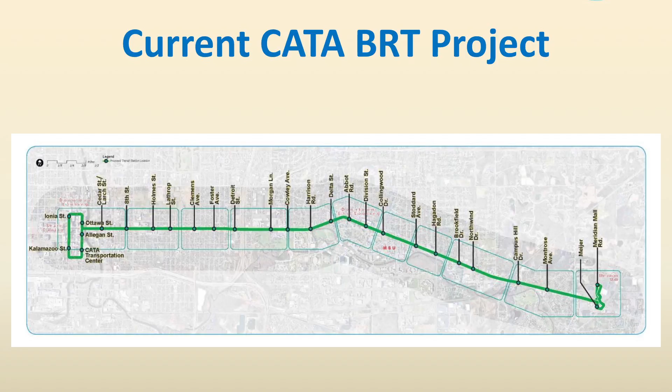One thing to note about the Capitol Loop is the buses will actually go contraflow on Grand and on Capitol. So one of the lanes used for autos today will be used for a dedicated bus lane in the opposite direction of the vehicles on Grand and Capitol.

From that point on, as we head east on Michigan Avenue, we will continue through Lansing and head easterly. So we're on Michigan Avenue heading east, and as we head east we will approach East Lansing. There are stations along the way, of course, spaced at about a quarter mile, roughly.

As we head east on Michigan towards East Lansing and MSU campus, we will hit Grand River. At Grand River, we will turn right and continue to head easterly on Grand River through East Lansing and through MSU campus. Again, there are station stops approximately every quarter mile along the way.

And then as we continue to head east on Grand River, we'll enter Meridian Township, and continue to head easterly until we hit Marsh Road. At Marsh Road, that is the point where the end of the line will be, and we'll enter Meijer, and there is a station proposed in the Meijer parking lot that would be built.

That would be the end of the line. Now, you can head back west on the same BRT bus heading westerly, and it follows the same route, just the opposite side of the road. At the Meijer, one thing to note at the Meijer parking lot, there is a 60-car park and ride lot proposed where you could park your car and get on the BRT.

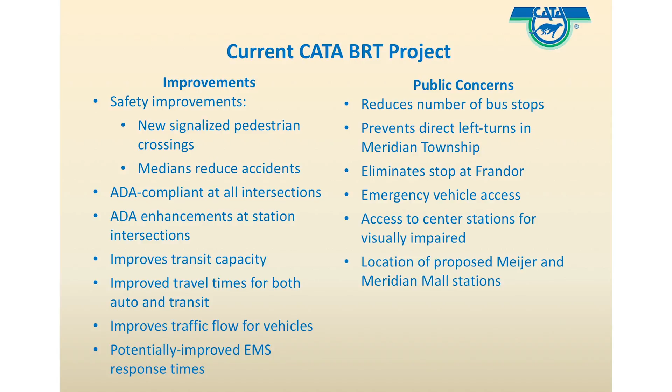Another public concern we heard about this BRT alternative is that it eliminates the stop at Frandor. A concern we also heard was how emergency vehicles are going to access side streets and businesses. We also heard a concern that access to the center station for visually impaired people could be a challenge. Finally, we heard concern about the location of proposed Meijer and Meridian Mall stations being further away than where buses currently drop folks off. There were many other concerns, but those were the ones repeated most often, so we wanted to highlight those.

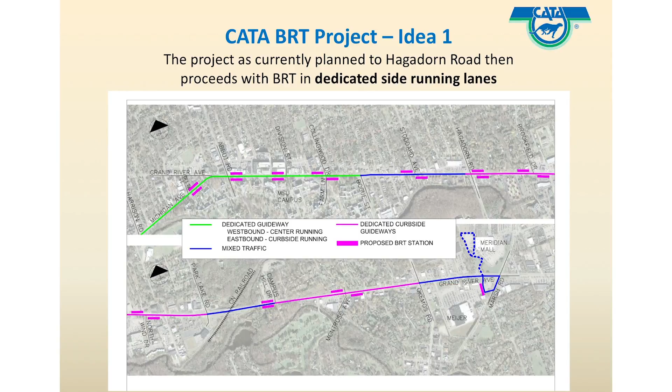That would allow the project to have a 2-way center turn lane down the middle, so you can access left turns into and out of all the driveways and businesses in Meridian Township. Mobility is increased with this option in terms of access to side streets and businesses. That does come at a cost, though.

The median is not as wide as a 2-way center turn lane, so the project is actually wider as a result, and the cost goes up to widen the project by a few feet on each side of the road. There's also right-of-way constraints along the corridor, so some parcels of land that aren't currently impacted might have to be impacted to fit that in. So the cost goes up to $140 to $145 million.

That's about 8 to 13 million more than the concept Sean just described. Property acquisition, depending on which parcels are impacted and the expense of those, which hasn't been fully vetted yet, could make those impacts go up even higher.

In terms of operating and maintenance costs, that's a 2.77 million net increase, marginally greater than the option just described by Sean. BRT ridership doesn't change—it's just that there's side running lanes for the BRT vehicles instead of median running.

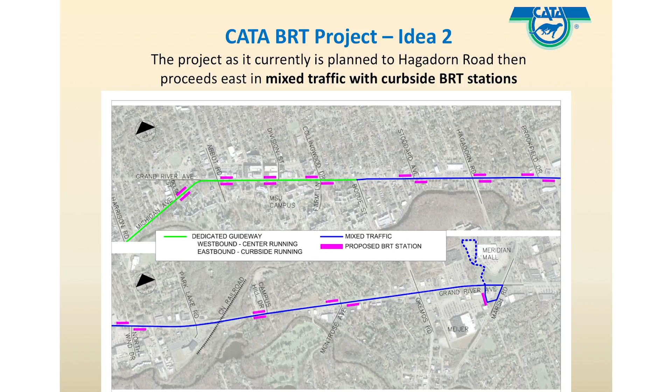With this option, you still keep 8.5 miles. One of the big changes is the number of BRT vehicles, which has to go up from 15 to 16 in operation, because the route is less efficient. When you're in mixed traffic with the cars and don't have a dedicated lane, the bus won't have the efficiencies it has from its own lane.

They'll have to work with cars and other vehicles, with stopping and turns and that sort of thing, so the efficiency of the bus goes down, requiring more buses to keep the frequency we want. The construction cost does go down, to $125 to $130 million, which makes sense because we're not widening the road east of Hagadorn to accommodate a dedicated bus lane. We'd just be using the existing lanes as they exist today.

This has the highest operations and maintenance cost at $3.05 million net annual increase compared to today, because again it's less efficient and requires more buses to get the frequency we want, so it requires additional costs in O&M. Projected ridership goes down with this option. The theory is it's less attractive because the route takes longer to travel.

The environmental factors associated with this include increased delay for all vehicles, since the buses are in the traffic lanes and you don't have the advantage of a bus in its own dedicated lane. There is also potential for diversion impacts: if the buses slow cars down and the road becomes overly congested, folks may choose a different path, diverting off Grand River or Michigan Ave.

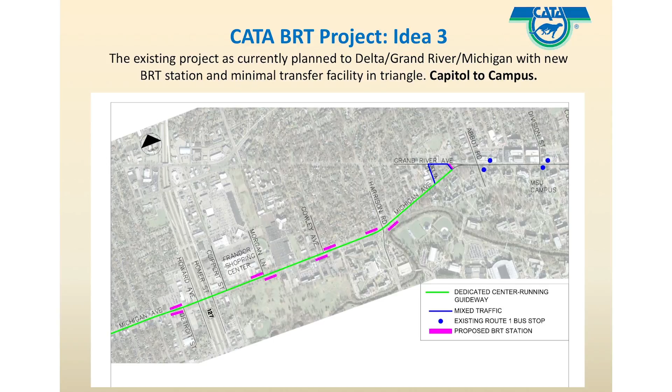Let me get your bearings straight. This is Michigan Avenue heading west towards the Capitol. This is Grand River heading west towards the Capitol. This is what we're calling the Delta Triangle right here. This is a visualization of what this idea might look like.

So as BRT vehicles come from downtown heading east, they would make a left turn on Delta in mixed traffic, make a right turn on Grand River in mixed traffic, and then turn into this parcel of land where a BRT station would be constructed. They would drop off passengers, pick up passengers, make a right turn back onto Grand River, onto Michigan, and head back to the Capitol.

In order to continue the line, Route 1 would not be changed at all along Grand River Avenue. Route 1 vehicles would come, make their turn onto Michigan Avenue, turn in, drop pedestrians and bus riders off here, and then get back on Grand River and head back east towards the mall.

So this is an idea that we're calling Capitol to Campus. This parcel of land that I just showed is very small, so having a transfer station here would be very, very difficult. It's very tight for transfers to occur there.

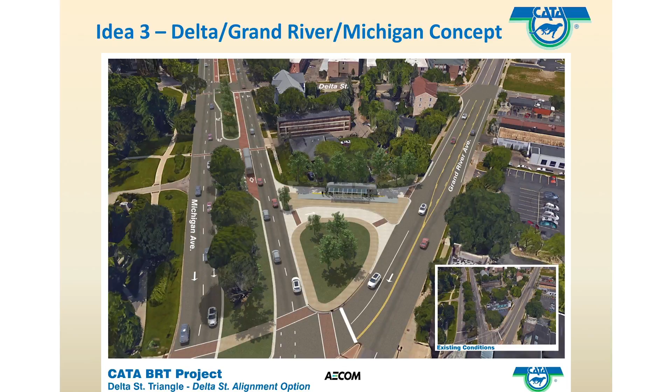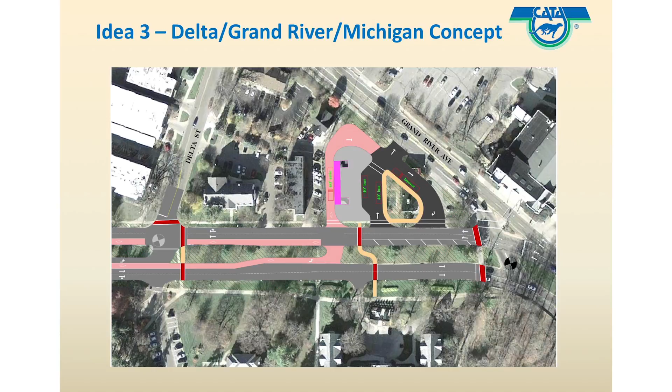Route 1 vehicles would come in, drop off their passengers, pick up passengers, and then head out Grand River back east towards the mall. So this idea uses just a little bit more land than the first graphic I showed you. The concept, though, is the same.

With this idea, the BRT service frequencies stay the same as in the current plan. Route 1 would be reinstated. It does require a transfer, which is one of the challenges associated with this option. Since the route is shorter, only 4.8 miles, the capital cost goes down to a little over 110 million to construct. Property acquisition is going to be an issue.

Of course, that's private property where those BRT stations are proposed, so that's certainly an issue that would have to be examined. The O&M costs would be about 2.6 million, so a net annual increase. The ridership is also reduced, since the BRT doesn't extend nearly as far east as ideas 1 and 2 do. Again, environmentally, that's a big impact to consider in purchasing that property in order to construct the station there.

In terms of opportunities, it's about 23 to 28 million less in capital cost, so it costs less, but that's because the route is shorter. It addresses many of the public concerns we heard at the meeting in August. We're still providing BRT from Capitol to Campus, and providing Route 1, which some folks had wanted reinstated, east of this Delta Triangle area.

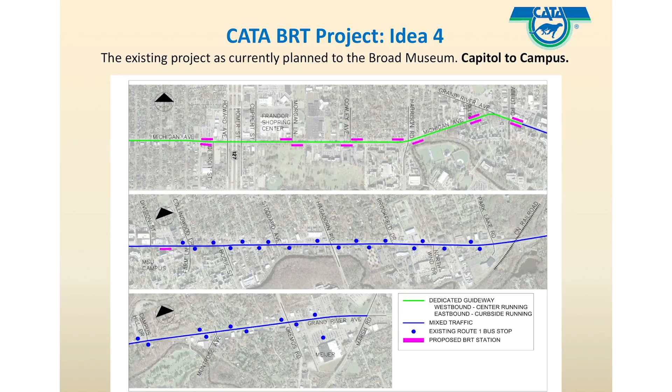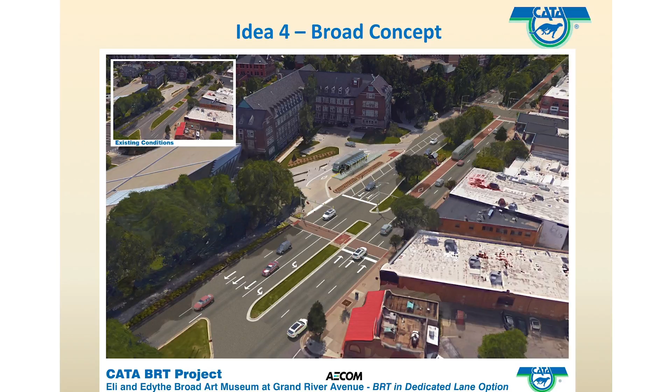The Broad is located here in this overall map. It currently has a pullout, which I'll show you a graphic of, and we would take advantage of that pullout and put a BRT station at the Broad Museum. To get your bearings, the Broad is up in this area highlighted in red. Again, this is an existing pullout area, so we would add a station here where the BRT would terminate.

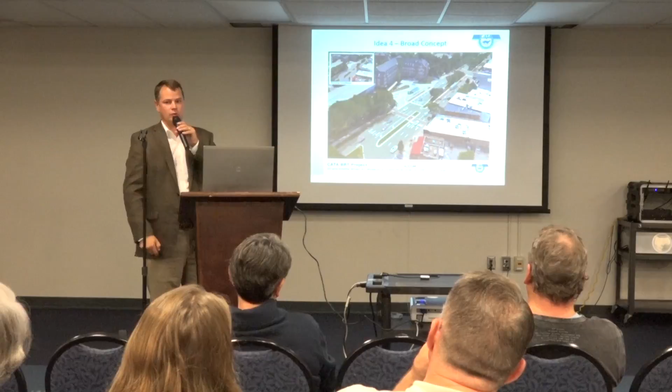When they turn around, there's a signal that would allow the buses to proceed back westerly, turn left, and head back towards downtown. With this idea, as Mike mentioned previously, there would be a transfer required if you wanted to go further east into Meridian, via a reinstated Route 1.

With this option, we're going a little further than idea number 3, 5.6 miles. The number of stations is 18, and this requires fewer bus vehicles since it's a shorter route, 13. Service frequencies are the same as the current plan. Route 1 would need to be included along the non-BRT segment, so a transfer would be required. The construction cost does go down with this option, to $100 to $105 million.

The annual operations and maintenance cost is $2.3 to $2.6 million. Again, the projected ridership is similar to idea number 3. One of the environmental challenges is placing the station on private property, MSU's property, so coordination would need to occur with the university.

The opportunities: it's a $28 to $33 million cost reduction compared to the current BRT. One nice thing about this idea is there's less BRT construction, so an earlier opening day would be possible. It also has lower annual operations and maintenance costs compared to the current BRT alternative. The existing medians, as Mike mentioned, are not impacted in East Lansing and MSU on Grand River. And the ADA upgrades are just 17 station signals compared to 27 in the current BRT, because the route is shorter.

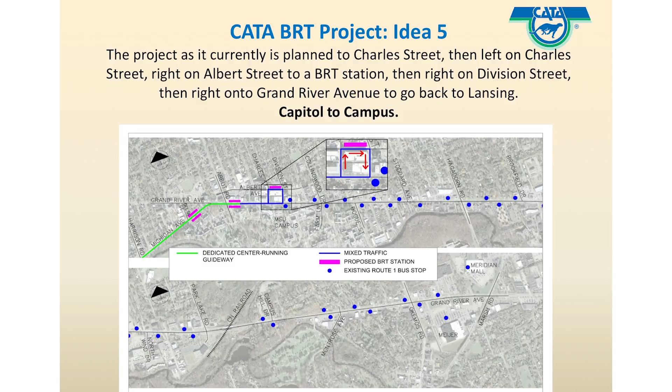All right, the last idea related to Capitol to Campus is a little different. This idea terminates the BRT route in East Lansing. It follows the BRT as originally conceived until east of Abbott, where the route would go north on Charles, east on Albert, then south on Division, back to Grand River, and follow west along the route back to the Capitol. That would be the location of the final BRT station.

Just like with the other Capitol to Campus ideas, once you get east of there, Route 1 would be reinstated just as it is today, with all the blue dots showing the Route 1 locations. This is a visualization of where this last BRT stop would be located.

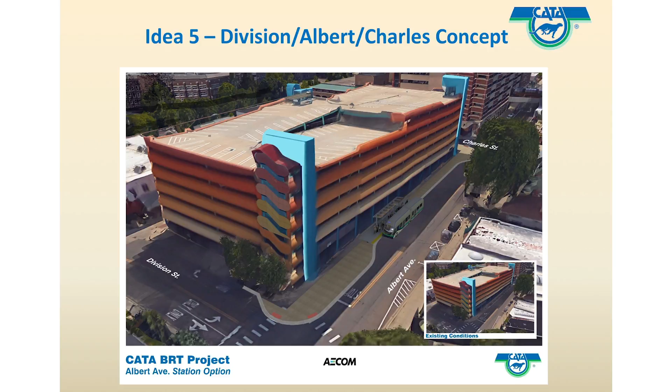This is in the block bounded by Charles, Albert, and Division, the colorful parking deck located there. This area currently has on-street parallel parking, which was originally developed by CATA as a station long ago for previous route operations. CATA can simply reconstitute this area and construct a station here. There's significant width, probably 200 to 250 feet, to use as a transfer station with enough room for a BRT bus stop and Route 1 pickups and drop-offs.

Overall with this one, the project length is shorter. It does require a transfer between the BRT and Route 1, as all the Capitol to Campus ideas do. It has a similar cost to the previous Idea 4, with the same type of operating and maintenance costs. And ridership is reduced since we don't go all the way to Meridian Mall.

In order to construct this station, there are traffic impacts to work through with the City of East Lansing. These buses are large vehicles and the streets aren't very wide. For a bus to turn from northbound Charles to eastbound Albert, and from eastbound Albert to southbound Division, we'd basically have to take the existing right-turn-only lane, curb it out so there's only one lane on approach, and get the bus toward the middle of the road to improve its turning radius. That's an impact we'd work with the City of East Lansing to fine-tune.

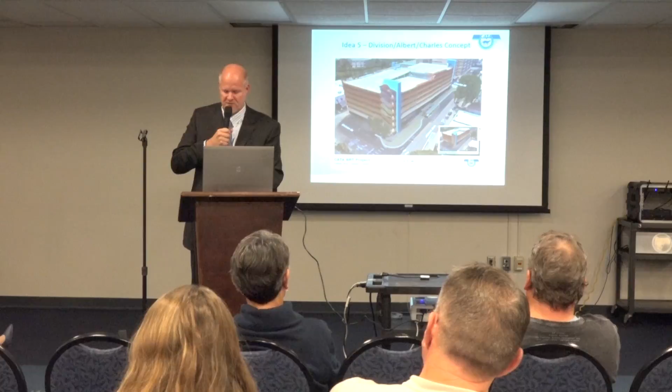So it does have a cost decrease. The route isn't nearly as long, so you could get the project into construction and opening earlier, with the same types of opportunities in terms of lower O&M costs and no impacts to the median along Grand River Avenue.

One nice thing is that the signal at Division and Grand River is already set up perfectly for the operation we'd want. BRT vehicles would come in, drop off, go south on Division, then head back west to the Capitol. Route 1 vehicles heading east would come down Division and make a left turn to head east, and that signal already allows left and right turns. So that's already set up for that operation, which is an opportunity with Idea 5.

There are fewer signals required in terms of modifications to the east, and ADA upgrades at 17 spots. There are 10 locations that don't really need these enhanced features, just like with the other ideas. Again, the big thing is a transfer is required with this one, and we'd have to work with the City of East Lansing on the right-turn-only lanes near the parking deck to make sure buses have adequate opportunity to make their turns.

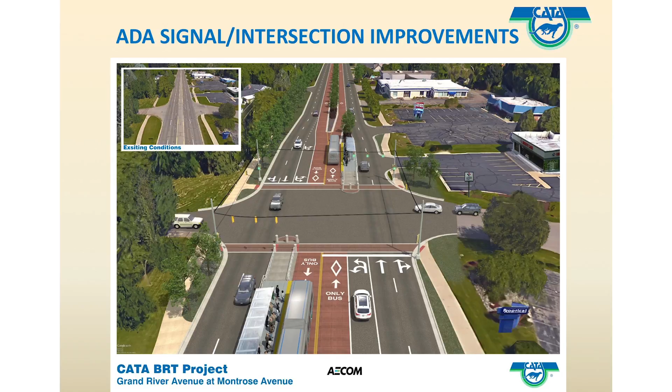There would be audible signals, specialized concrete here with tactile strips and colored concrete to enhance that location, enhancing the visual cue on how to get to the median, so people could either cross the road entirely or cross into the median to access the BRT station. With a lot of these ideas, when we take away the BRT in the median, there's no need to put a traffic signal there anymore. So presumably with idea 1, these BRT stations would be on the outside instead of in the median, and you would not need a signal at that location.

Okay, just a couple more slides and we'll wrap up here.

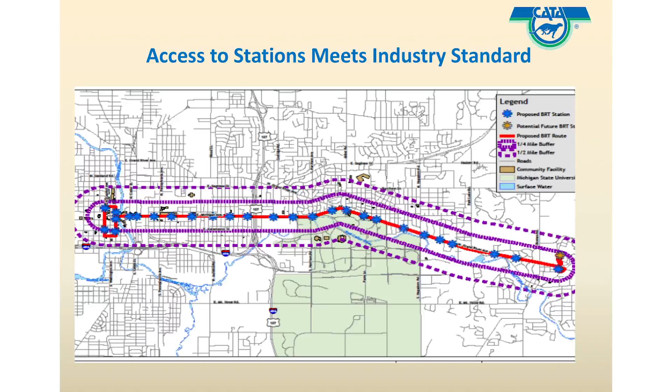This is the access to stations meets industry standard. This graphic shows the buffer zones around the route. The purple dashed line with close spacing is the quarter-mile buffer around the corridor, and the purple line with bigger space dashes is the half-mile buffer. We want to point out that for transit, it's industry standard to be within the half-mile buffer, which this proposed route is, and in fact most of the stations are within a quarter mile of each other.

Finally, this last slide is an idea that could apply to all the ideas, so we didn't include it with any one specific concept. It's a Frandor concept. One of the comments we heard in August was, what about Frandor? What about access to Frandor? So we produced an idea that would still allow access to Frandor.

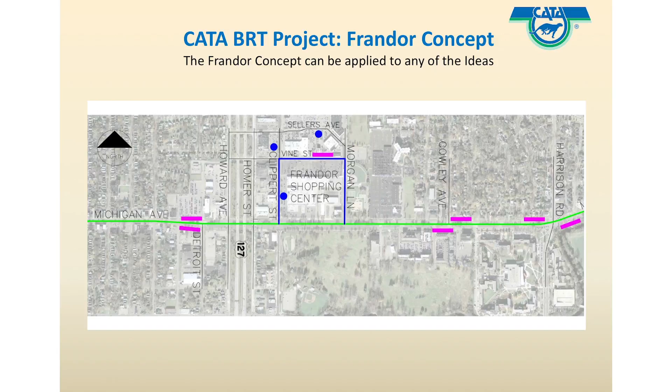If you're traveling eastbound on Michigan Avenue, as you came to Clippert, you would turn left onto Clippert and head north in mixed traffic, then turn right onto Vine Street in mixed traffic, and we would produce a transfer station at Frandor.

The vehicle would proceed from the station to Morgan Lane, head south on Morgan Lane, back to Michigan, and head east. Conversely, we would also allow westbound BRT buses to turn right on Morgan Lane and head north onto Vine Street, access the station, then take Vine to Clippert and back down to Michigan.

So this was a concept that could be applied to any of the ideas. We thought it was important, rather than showing it with one specific idea, to bring it separately to show that this could be added to any of them. Several ideas are that way - they're not necessarily mutually exclusive, in that they can work with other ideas.

So with that said, I'm going to turn it over, and I think we'll get to question and answer sooner. It's actually just about the ideas that were articulated.

Can you give a price for the overall cost for number 5 that wasn't said out loud? Sure, let me go back here and just make sure I give you the right number. Thank you.

Number 5 was $100 to $105 million. That was very similar to idea number 4 - they were both the same cost range. How about operating costs? Again, similar to idea number 4, $2.3 to $2.6 million. It is less because it's a shorter route, so it's less than the current BRT.